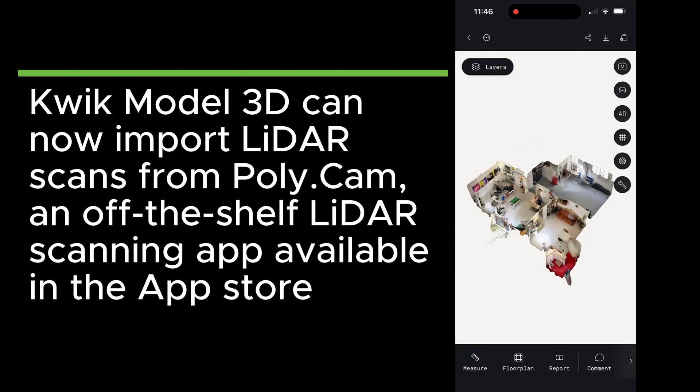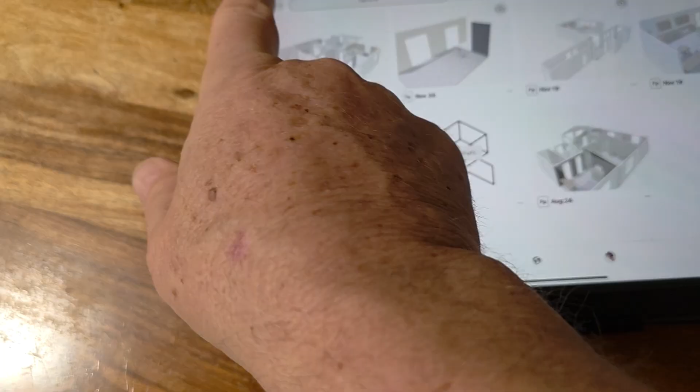Start Poly.Cam on your LiDAR-capable iPhone or iPad. Go to your scans and press the plus button to start a new scan. Be sure to select the floor plan scanning choice.

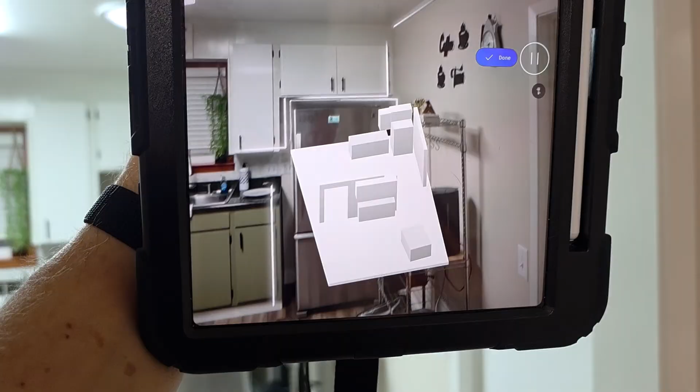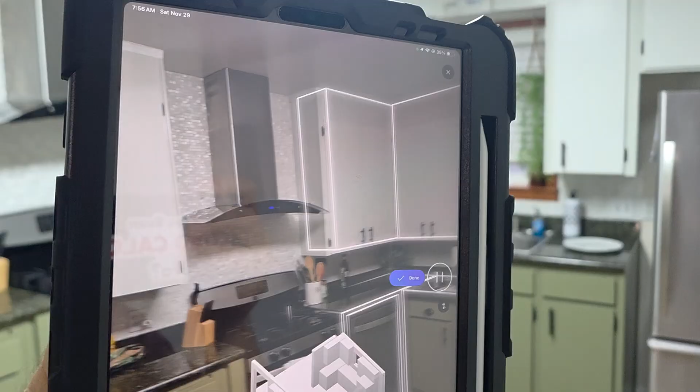Start in one room and scan the entire interior of the house. Notice how it draws white lines where the walls meet ceilings, where walls meet walls, and where walls meet floors. It will capture doors, windows, and even cabinets and furniture.

Now notice how it builds a little 3D model in the lower part of the screen. Keep scanning until the 3D model looks complete. Don't rush it. Go nice and slow so that it captures all of the surfaces. And try to go into every room.

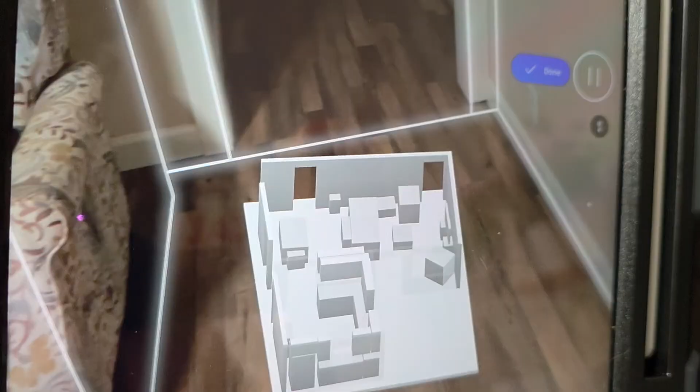Even if you can't go into every room, you can easily add and edit rooms in Kwik Model after you import the scan. After you are done scanning, save the scan, and be sure to take photos of the entire outside of the house so that you can double check the windows.

So after you've finished your scan on your iPad or your phone, you can process it and it will save it to the Poly.Cam library, which you can access online either wherever you are from your laptop, or maybe someone back at your office can do it for you.

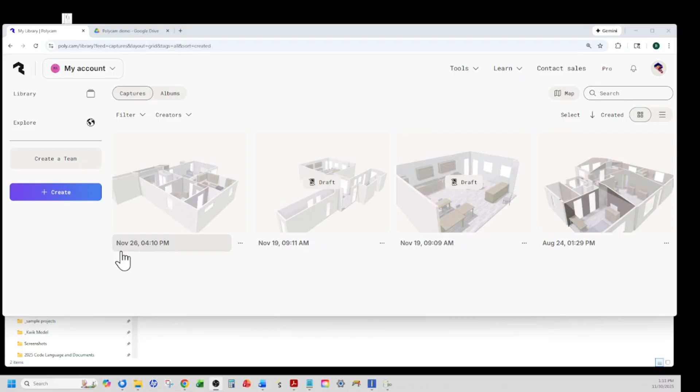But the point is that it will be saved online, and you just find it by going to the date and the time where you made the scan. There's a picture of it there, and you can go in and look at it and make sure that it looks good.

And even if it's not, even if there's a couple things like in this particular scan, I did notice that it missed an entire wall right here for some reason. But that's okay. Once it imports into Kwik Model, it's really super easy. There's very powerful room editing tools that you can use.

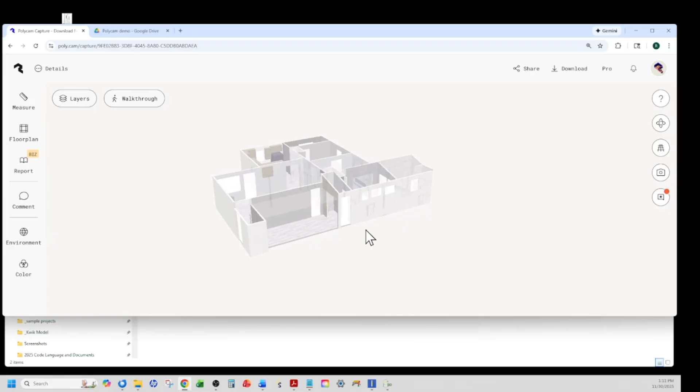So what you want to do then is download it, and you want to save it as an OBJ file. That's very important. That's the file that Kwik Model can convert into the Kwik Model rooms. So hit export. Oops, click on that first. Hit export.

And depending on your browser, it will show up here. And then you just drag that into your project folder. And then you want to extract it. So you can right click on it and click extract all. And it's doing this on another monitor. And there you go. That's what you want right there, is that OBJ file.

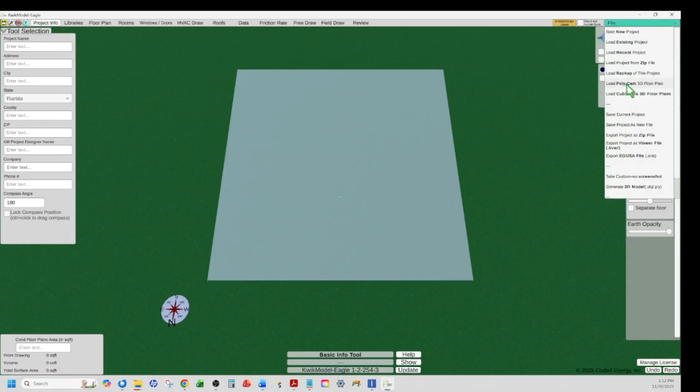Okay, now open up Kwik Model, and then go into the file command. And there's a choice there for load Poly.Cam 3D floor plan. That's exactly what you want. Find that OBJ file, click import,

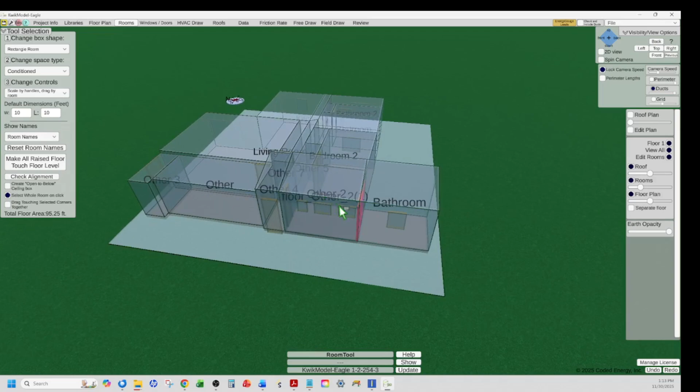and there you go. Kwik Model converts it into Kwik Model boxes, which are super easy to edit. There's a few little things that you might want to clean up. You can clean up some of the boxes if you want. You can name the boxes if you want. If you see anything that's pink like that, it just means there's some overlapping things, so we can clean those up very easily.

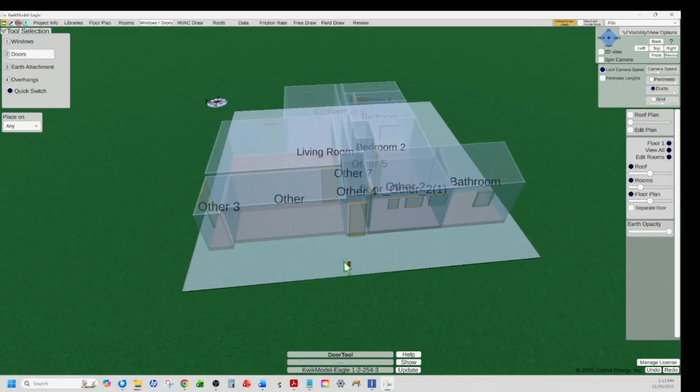Interior doors are totally optional. Remember the wall I mentioned that wasn't there? There it is right there. So it did put that wall in there, which is good. And a few other rooms it didn't quite know what to name. Also, it's got an overlapping room here, so let's just clean that up really quick.

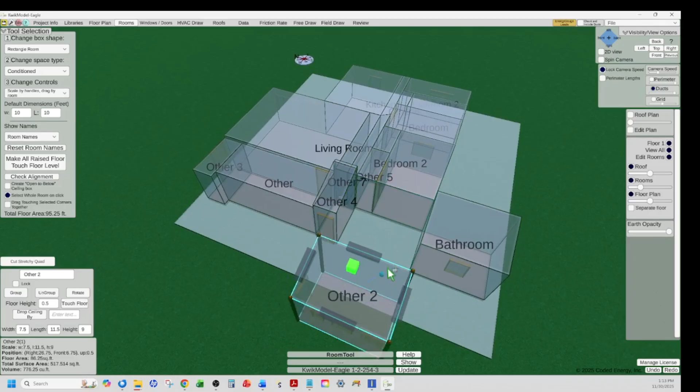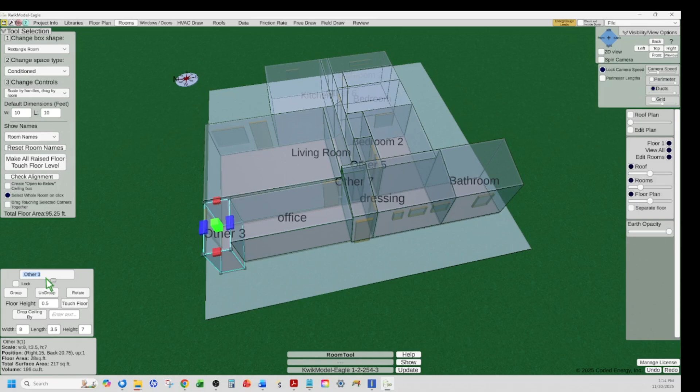This was a dressing room. Let's group these together. This was an office, and this was a hallway going out to the garage. Actually, let's group that with the living room. That's not going to get a register, so we'll group it with the living room.

And this was a closet. We'll group it with that bedroom. And so grouping is important, because anything that doesn't have a register in it needs to get grouped with another room. And so that's basically what I'm doing here.

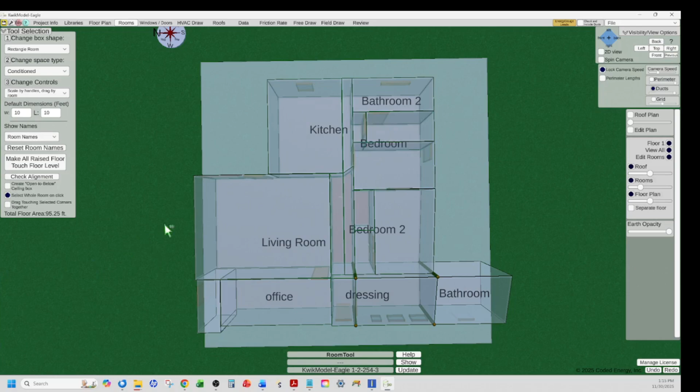Anything that says other, it's like this little closet here, we'll group that, make that go away, and that looks pretty good. There's a few extra boxes in here, but those are fine. Don't worry too much about those. A lot of those interior walls will actually go away when you click on the data tab and it processes the rooms.

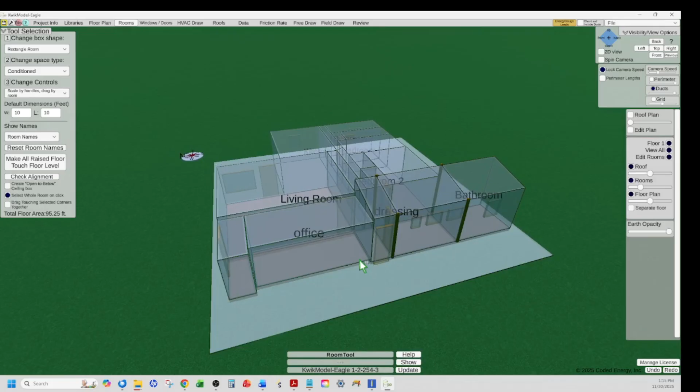It'll get rid of some of these interior walls that make it look a little chopped up. But one of the things you want to do now is customize it. You want to compare to the photos - you always want to take a bunch of photos of the outside of the house, and you can look around the house and compare windows. You'll notice on the back of the house here, there were three windows here and three windows of the same size here. So the Poly.Cam scan didn't quite pick that up.

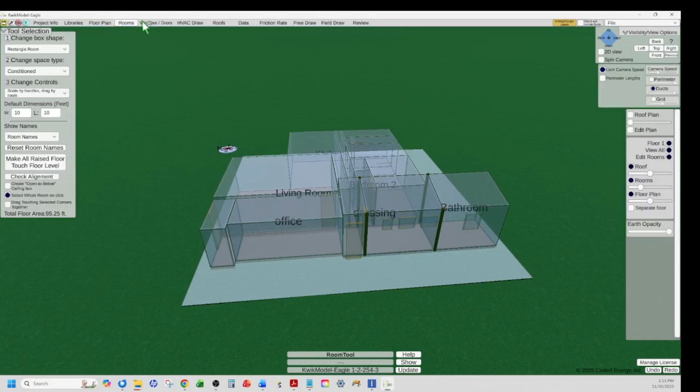So I'm going to clean this up a little bit. Let's go to the Windows tab and let's get rid of this one. For some reason it's a little small, but they all look like this window here. So I'm going to do Control C and then Control Alt click, and then 1, 2, 3 - we'll put three of them right there because they all look like the same window from the outside of the house. See, those all look like the same size.

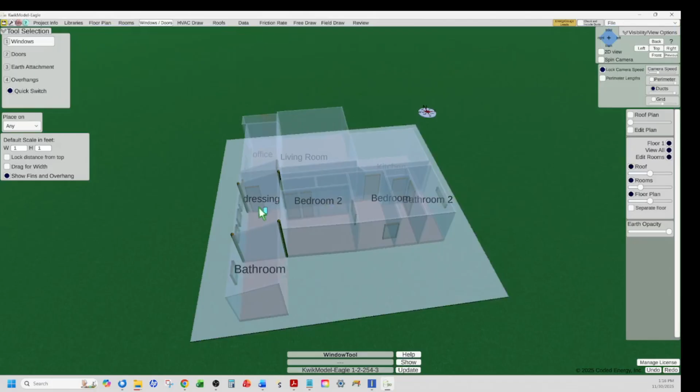And there's a little window down there. There's the garage - oh, we definitely want to put a garage on there. That's another thing too, garage does have an impact on the surfaces. So these walls here are adjacent to a garage, so we want to make sure we put a garage there. The way to do that is just place a big box, call it unconditioned garage. You'll notice that it's a different color space, a different color box, meaning that it's unconditioned. It doesn't really matter the exact size as long as it's covering the walls that are going to be adjacent to the garage so that those walls get treated correctly.

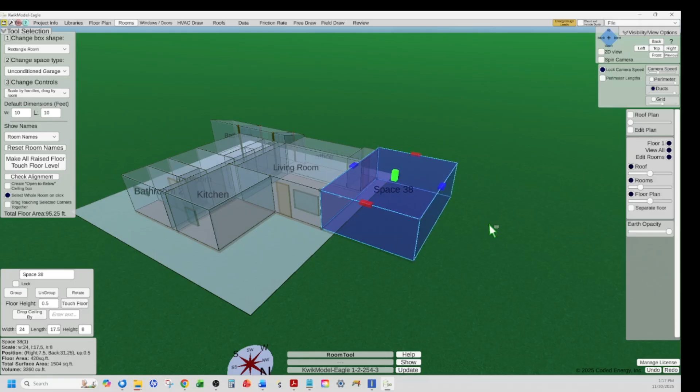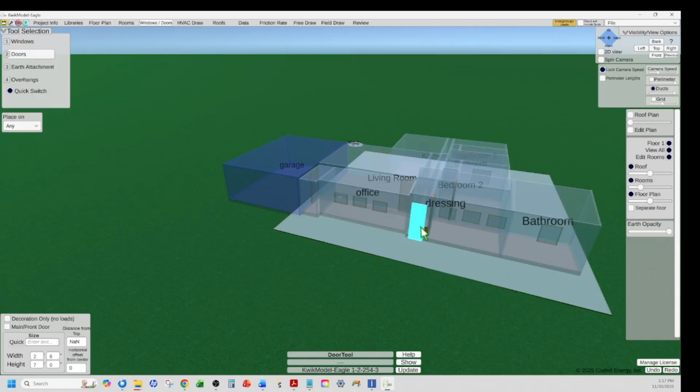Let's give it name it garage. Okay, and that looks pretty good. It's got a window there, little window there. There was a window there, those three windows, a door. Let's clean up this door a little bit. It also looks like it picked up that there was a slight step up in the slab here, so we can clean that up.

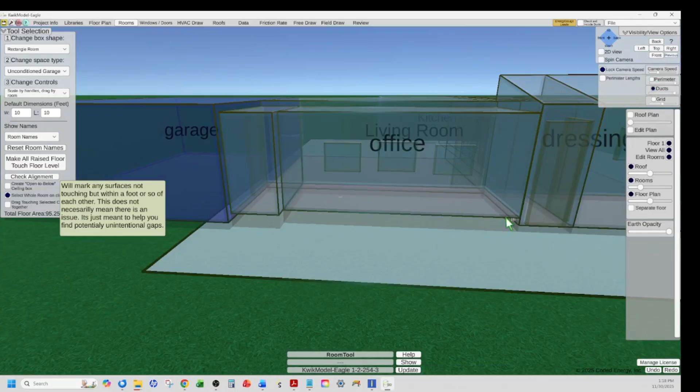If we go to rooms, make sure that it's touching. Now it'll also look for boxes that aren't completely touching. Let's do this real quick, make all floors. Okay, and it just made that slab a little deeper. And that looks pretty good.

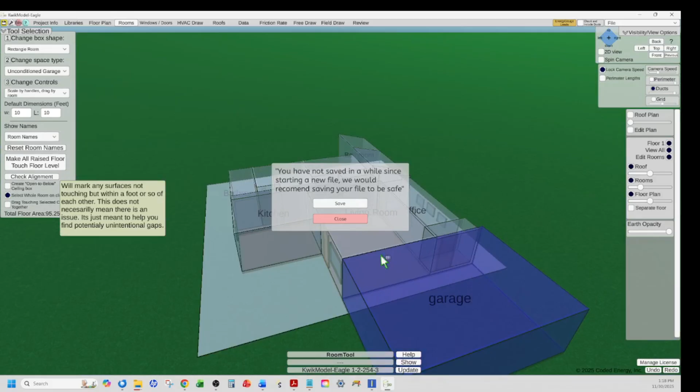Notice that it did catch these vaulted ceilings in there, which were actually in the house - we checked that. And so that's important that that gets caught. All right, that all looks pretty good. Let's save the project. There we go.

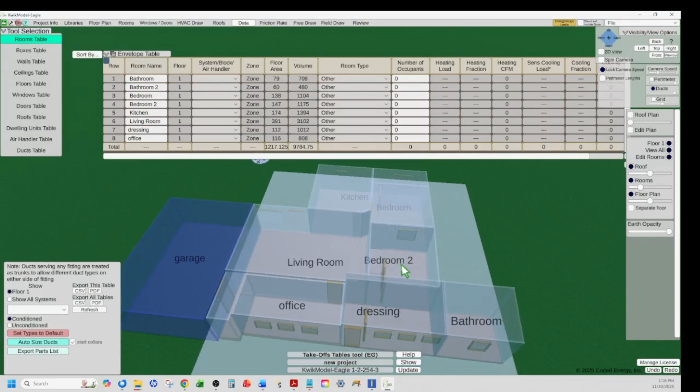Awesome. Okay, now as I mentioned, when you go into the data tab, it'll get rid of a lot of these weird box walls inside. Let me show you how it does that. So there's all our rooms, and you can see there a lot of those interior walls went away. So it looks a lot cleaner now, and the rooms are all separated nicely.

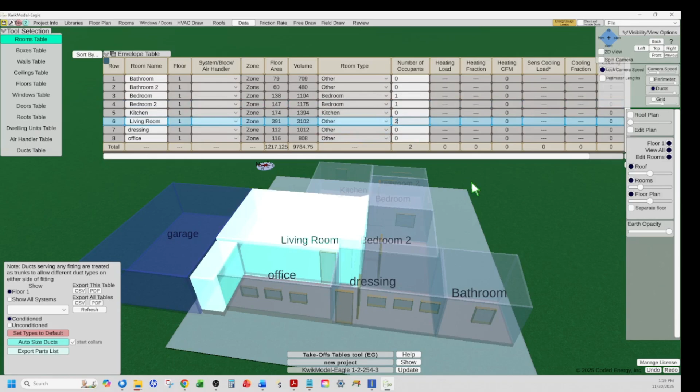So each room - like so. So then you want to designate the bedrooms as bedrooms and the kitchen as a kitchen. Everything else is an other. And then you want to sprinkle some people around. I like to put one in each bedroom and then a couple in the living room, something like that - and office, dressing room. Yeah, that looks good.

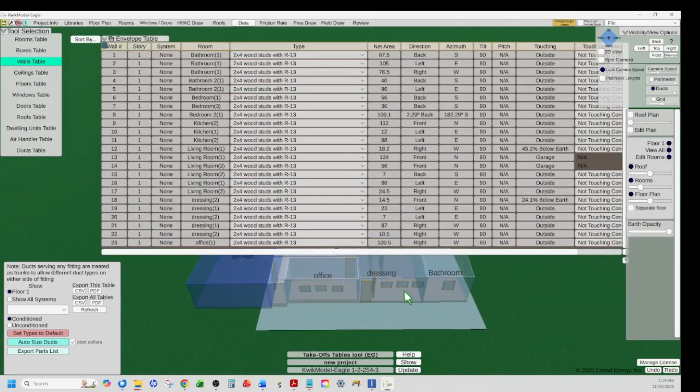Okay, now we can go in and assign wall types. So it defaulted to 2x4 wood studs with R13. I think that might be a little high for this house - this house was built in the 80s, so it probably actually has R11. So let's change it to R11. Hold down the shift key, I can come all the way down here and shift, and they all turn to 2x4s with R11.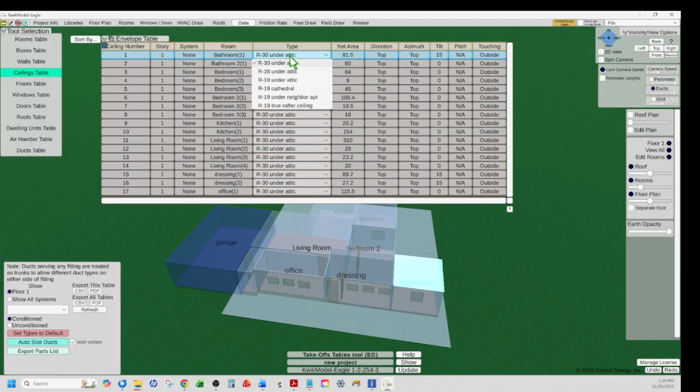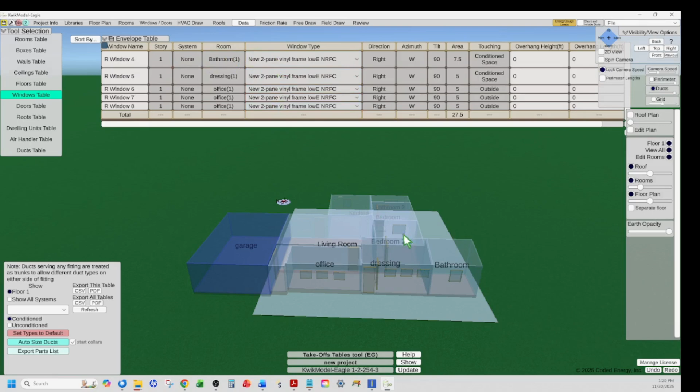Let's go to the ceiling. It defaults to R30, I think that's a little high for this house. It only had about 6 inches of blown-in insulation, probably more like R19, so let's do that - R19 under attic, there we go. The floors were all slab. This house actually had newer vinyl pane windows, so they were all pretty good windows, so I will leave those. They defaulted to vinyl frame windows. That looks pretty good, and that's about it.

Now at this point, we just run the load calcs and it will do it for you. All right, hope that worked out for you. Thanks for watching.